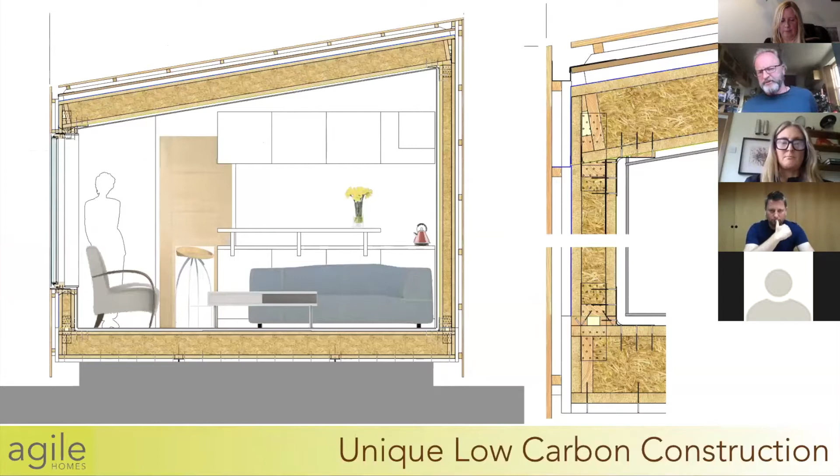And we make it all out of renewable materials. It's entirely made out of timber and straw. And so we're going to fix climate change as well as the housing crisis.

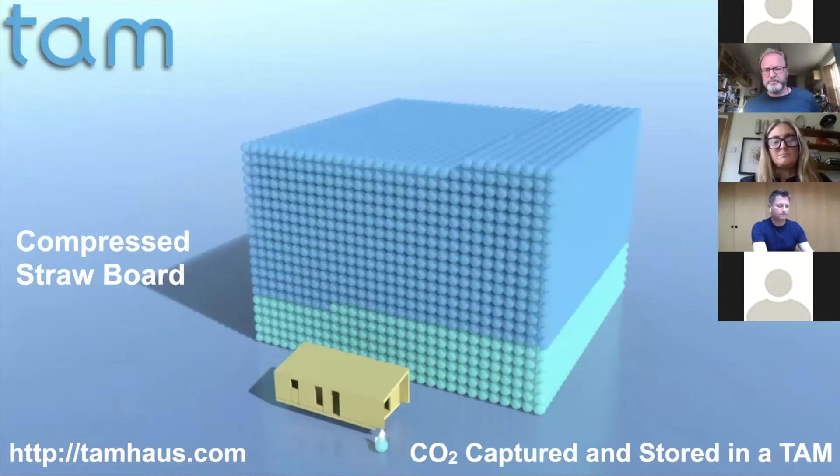So this is how we make a TAM. So that's the straw insulation. And if CO2 could be pumped into little kind of balls like the one I'm sitting on, that's why I'm bouncing around - that's the amount of CO2 not in the atmosphere, but consumed by the straw. That's something called compressed straw board. Then we have timber structure. Then we have the cladding. And this building has captured and is storing 27 tons of atmospheric CO2.

And then the beauty of designing buildings that do not glue themselves down to the ground is that you can then imagine where you could put them. That land isn't what we always thought it was. There's a lot hidden in plain sight, and then there's areas of our city and townscapes and urban townscapes that we can develop.

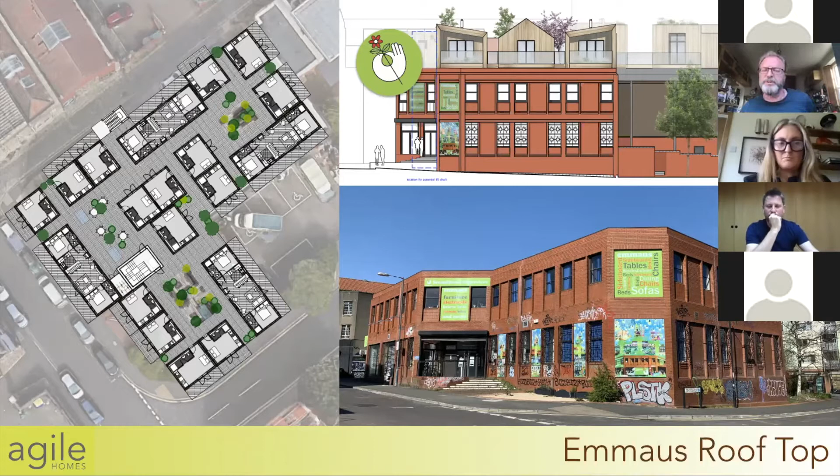So this is working with a homelessness charity called Emmaus. Bottom right is the picture of the existing building, and we're going to put 21 units of different sizes up on their roof.

Working with Leeds Community Homes, I was fortunate enough to work on the Lilac co-housing project in Leeds, and Leeds Community Homes came out of that project.

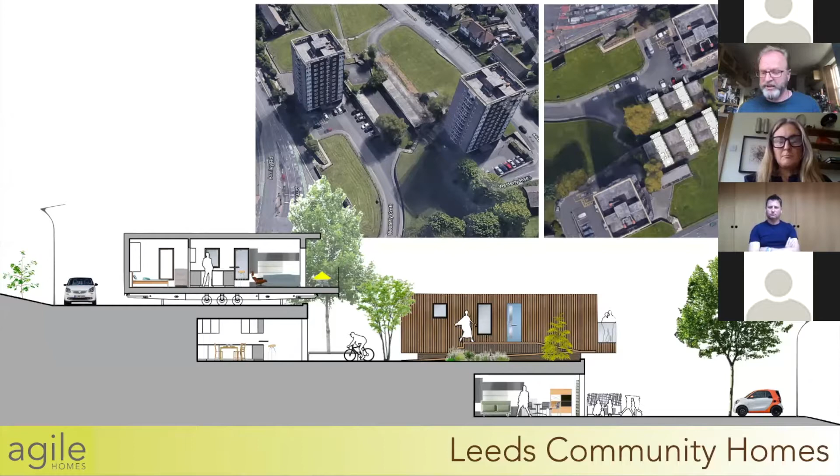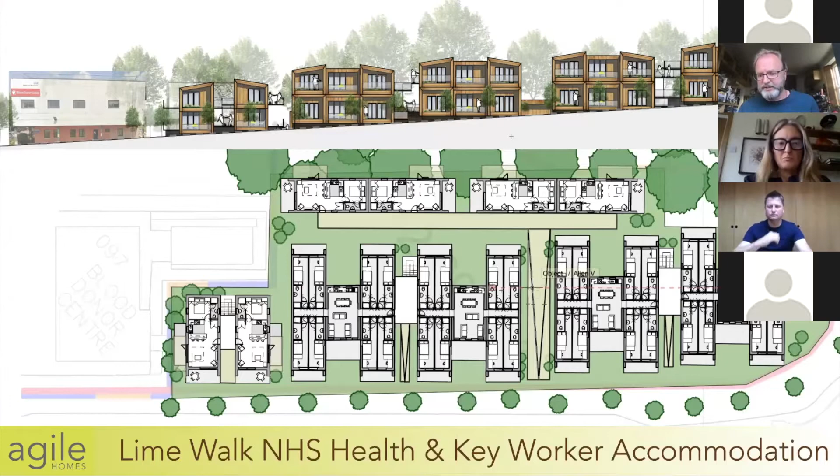And then this is us working with the NHS here in Bristol with the local trust. The number of health and key workers we need to accommodate rapidly in the UK to meet demand is going through the roof, and all of this is designed to meet that need.